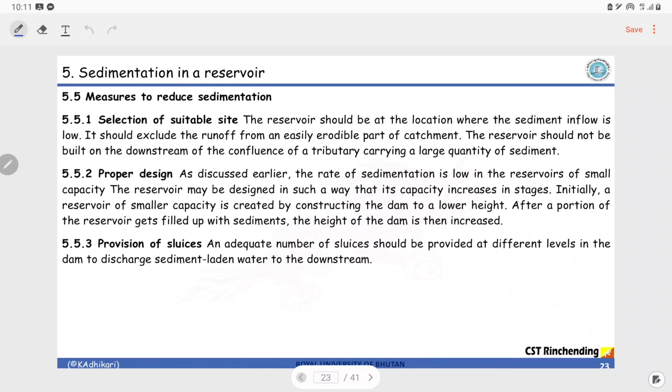That is the understanding. But if we look at the sedimentation versus capacity inflow ratio graph critically, we realize that this curve is not linear. With increase in capacity ratio, sedimentation does not increase linearly. Up to a certain limit, yes, it increases, but after that it remains kind of constant.

So till this region it increases, true, but after this it remains kind of constant. So if you construct a dam or reservoir that belongs in this domain, then of course there's going to be sedimentation. But if you construct a reservoir with a capacity inflow ratio more than this, then the sedimentation remains constant. So why don't we go by a very large reservoir? That is the point.

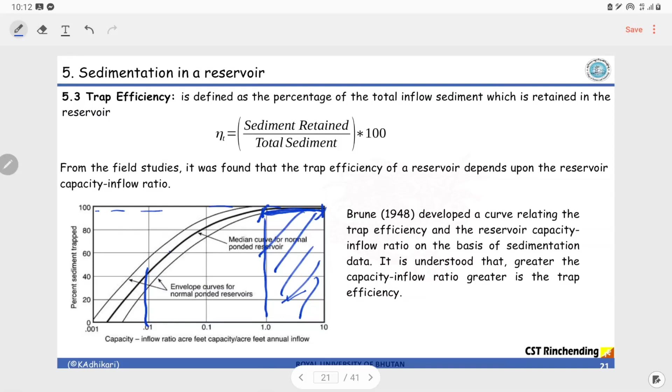So for a large reservoir, of course there will be tremendous sedimentation, but by going by this graph, the sedimentation remains constant. Even if you create a very large dam, the sedimentation would be the same as this one. So go for a very large dam. That is the meaning when we say this term, create a large reservoir. Although it is contradicting with the actual thing happening, the sedimentation happening in the reservoir, if we critically analyze the curve, we realize that creating a massive reservoir has an added advantage, because the sedimentation remains constant.

So that is one. Next, we are discussing the methods to reduce sedimentation. Next on the list is control of sediment inflow. So how do you control the sediment inflow? One way is constructing check dams. Check dams are constructed a little bit upstream of the main dam, so all the sedimentation occurs in the check dam, and later on you can remove it.

And there's another one, vegetation screens. Basically what we're trying to say is cover the entire catchment with vegetation. If there is deforestation, plant the trees, so that the roots hold the soil particles, resulting in less erosion, and the total sediment into the river reduces.

The next one is control of deposition. To control deposition, the best way is by providing a sluice gate. That is the most effective way. There are some other ways so that there is less sedimentation, but the most effective one is providing the sluice gate.

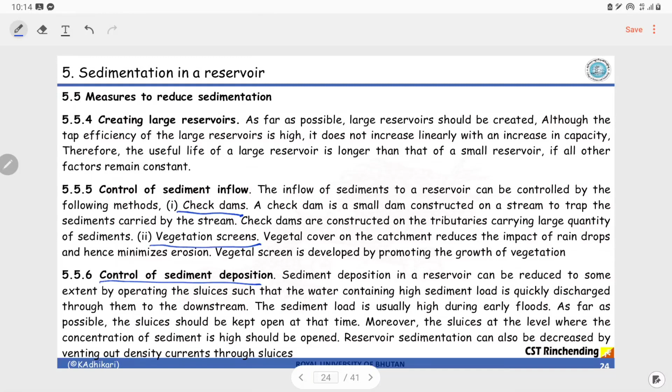There is also another method, that is physical removal of sediments. This means for a time being you completely let go the water, make the reservoir empty, and then you remove all the sediments. But that is going to be pretty expensive, very expensive. So usually this is not the choice. Instead, a sluice gate would be a better option.

So soil conservation measures are effective for controlling sedimentation in a reservoir to some extent, but are expensive, because you are applying the technique in the entire catchment, and the catchment can be very large. But these are very efficient long-term measures.

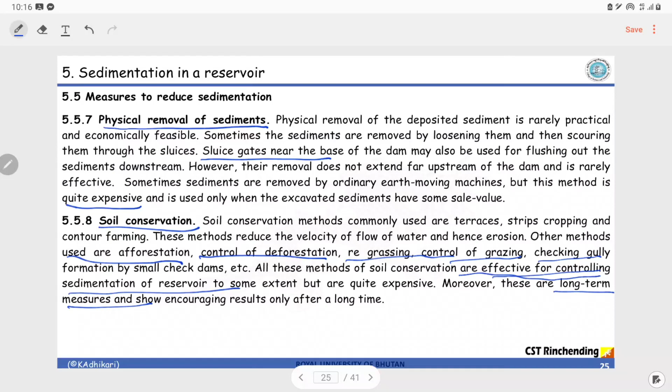And the next topic we have is losses from the reservoir. Now you have constructed a dam, there's a large reservoir, and you realize that the amount of water is drastically decreasing over time. It could be because of evaporation. When you hold water in a large pond, there is going to be huge evaporation. So there are methods to reduce the evaporation.

Next type of loss is absorption losses. Absorption means once you construct the reservoir, all the water rises up, and it is in contact with the mountain sides, and these mountain sides may absorb water. Eventually this will go as seepage into the groundwater. So this is one loss where, in the preliminary phase, if people see some kind of loose materials or fractured rocks, they do the treatment.

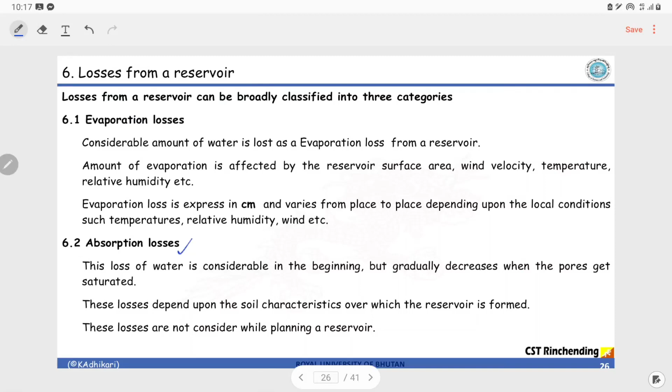This is a continuation on reservoir leakage and percolation. Within the site where the dam is constructed, there could be fractured rocks or seams that are highly permeable, leading to huge seepage and losses. During the construction phase, if such strata are found, some kind of treatment is done for those fractured rocks.

For large scale treatment, grouting is used. Grouting means you make a cement paste and spray it over that region. If you want to see this in the real world, you can visit any dam site in the country. One famous example is the Punatsangchhu Phase 1 project, where along the dam site they do grouting to control landslides. They do it for landslides, but it can also serve as a barrier so that there is no seepage.

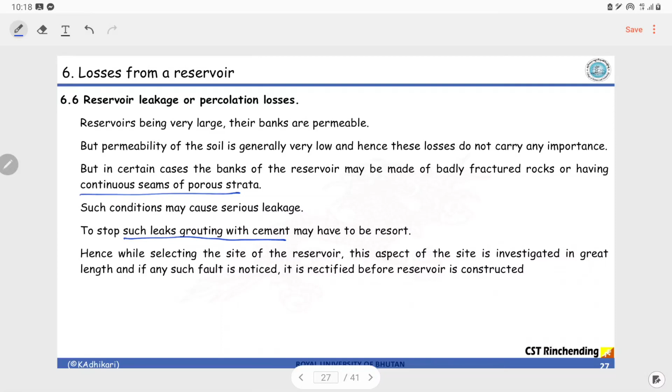Let's continue our discussion. Now we are going to discuss the dam. Till now we were discussing the reservoir, which is the pond formed upstream of a dam. A dam is an engineered concrete structure built across the river so it can hold the enormous water pressure and facilitate a reservoir.

Moreover, you cannot simply construct a dam and not let even a single drop of water downstream, as the aquatic life downstream will die. So you have to let at least some minimum flow, which we call environmental flow, from the dam. Sometimes an additional spillway is provided at the periphery, called an auxiliary spillway, and sometimes the spillway is not constructed over the dam itself, only the auxiliary spillway at the periphery is constructed.

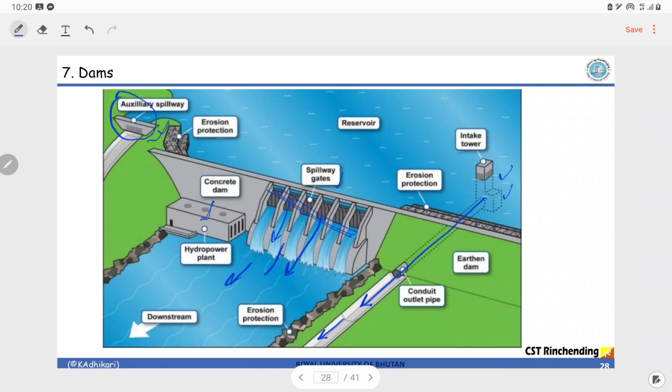Let's continue. So, preliminary investigation for dam construction - what kind of investigation is required? Basically there are three types: the first is surveying, the second is geological investigation, which is very important, and the third is hydrologic investigation, again very important.

In engineering survey, they map out and do the topographic survey of the entire stretch. For the dam site, they prepare a contour plan of 1:250 or 1:500, and for the reservoir, usually a lower resolution contour is generated out of surveying.

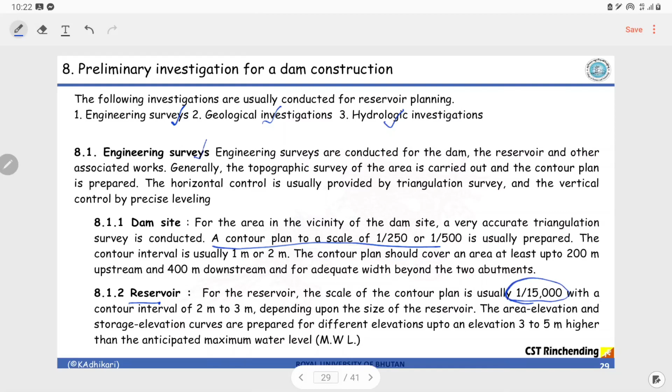During the engineering survey, when you plan for a reservoir, the first thing you do is the engineering survey. In olden days, people used the theodolite, dumpy level and total station to do the surveying. Now people use advanced technology like LiDAR, GNSS and GPS systems to survey on a large scale, which is more accurate, less time consuming, and less expensive compared to traditional equipment.

Next is the geological investigation, which is what you guys are expected to do. For geological investigation, the most important thing is to find out whether the foundation of the dam is suitable or not. There are various methods for this; they usually go for subsurface exploration, meaning they find out what kind of strata, rock, and soil properties exist where you construct the dam.

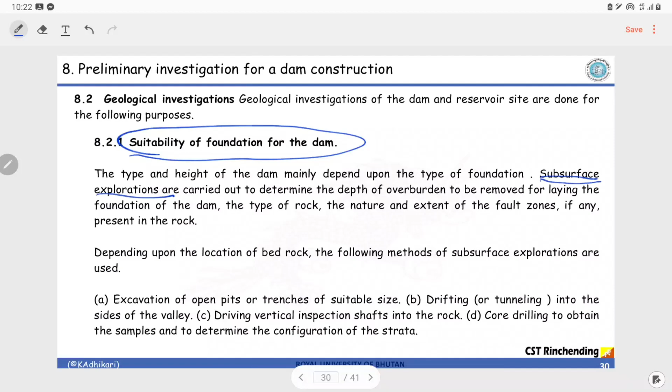For subsurface exploration, there is excavation of open pits - they dig the pit and take samples out. There's also drifting or tunneling, where they bore a hole from the mountain to take out samples, and vertical inspection shafts into the rocks, where they drill a hole into the rock to take out samples. Core drilling is often done to determine the configuration of the strata. They do this to get the information.

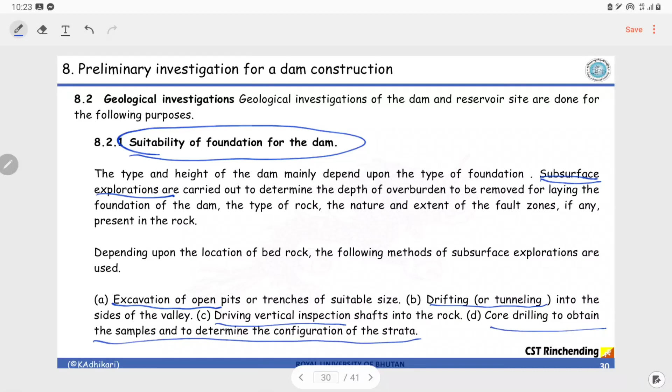They also check for water tightness of the reservoir. As the name suggests, water tightness means checking if there are fractured or fissured rocks, cavities, or porous mediums, which are not desirable. If such geological formations are identified, they will try to remove this and replace it with concrete, or do some kind of treatment to conserve water. If the strata in the periphery of a reservoir or dam is porous, there will be huge losses due to seepage, which is not desired.

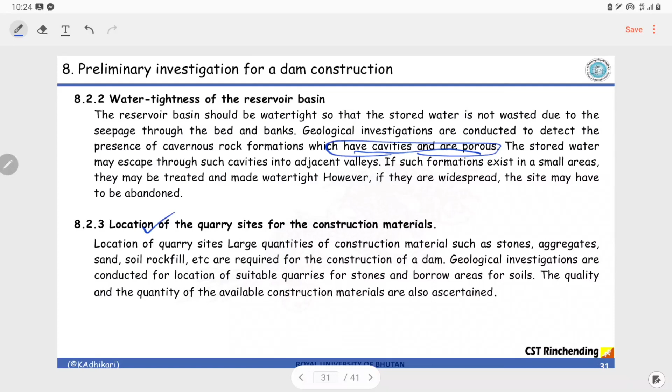The next point is the location of the quarry sites. Quarry site means where you extract the raw materials for construction. If your quarry site is far, there's a cost of transportation, so the overall cost will increase. If there are quarries nearby, then this rock or construction material will be utilized to construct the dam.

The third one is the hydrological investigation. In hydrological investigation, they basically do the runoff pattern and yield estimation. Yield means how much product, and when translated to a river, it means how much water is available. You check how much water is available, and whether that is sufficient to fill up your dam in a certain period of time. If that much water is not able to fill up the reservoir, then the site of construction of the dam may have to be changed.

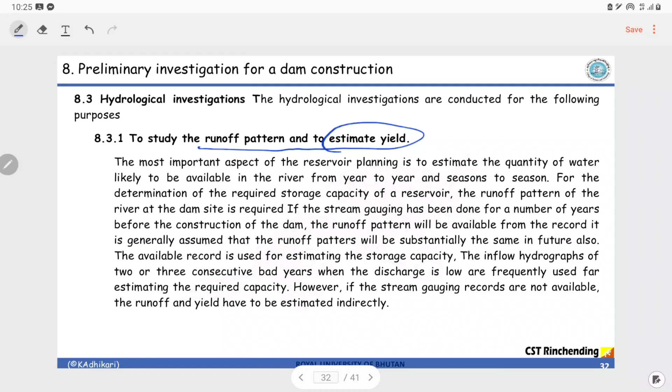They basically do discharge computations. They will see the possibility of high flood scenarios and low discharge. When there is low discharge, they check whether the demand line will be fulfilled or not with stored storage. This kind of analysis they do.

Next, as I explained, is the maximum discharge. Maximum discharge here means the flooding scenarios. When a huge flood comes, we have to have an adequate spillway, else there is always a chance of the dam being overfilled, and there is always a stability issue. If the water level goes beyond the maximum level, there's always a chance of failure, which is not desirable. So they calculate the maximum discharge possible in that catchment, and accordingly design the spillway, so even if there is a flood, we have a spillway to let off the flood discharge downstream.

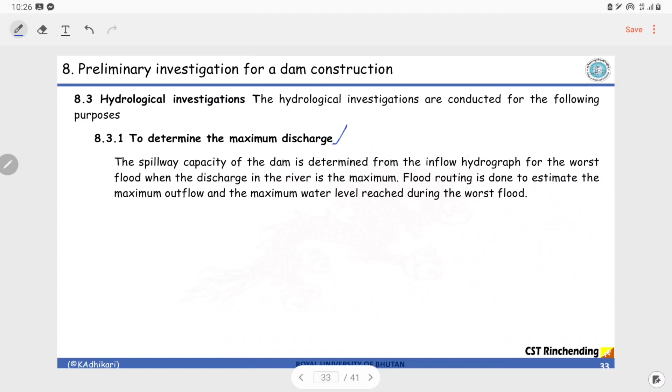After you construct a dam, you generate power, and in our case we sell that power. We have to check in how many years the cost of construction can be recovered. If you construct a dam so expensive that in the next 100 years you cannot recover the cost, then we are in loss - that would be a very stupid idea. So we do this economic balance analysis. If we cannot overcome the cost of construction, meaning retrieve that much money through selling services, it is a loss, so you may not go for that project.

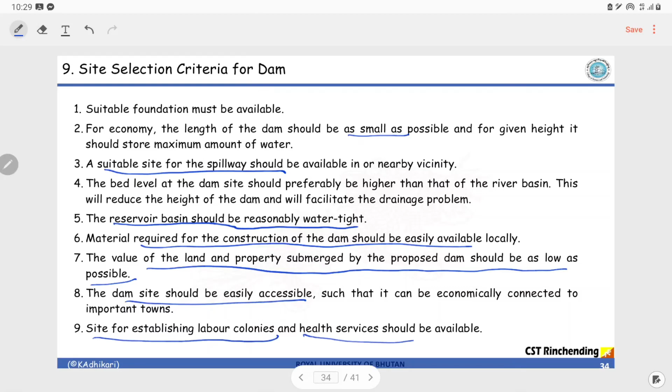Okay, now let's discuss the classification of dams. We have basically 4 types of classification. So let's go one by one.

The next one is the gravity dam. The highlight of the gravity dam is that its weight counterbalances the pressure of the water, and it is a concrete dam or masonry. The span is kept narrow to keep the cost minimum. The main highlight is that the weight of the dam counterbalances the pressure force.

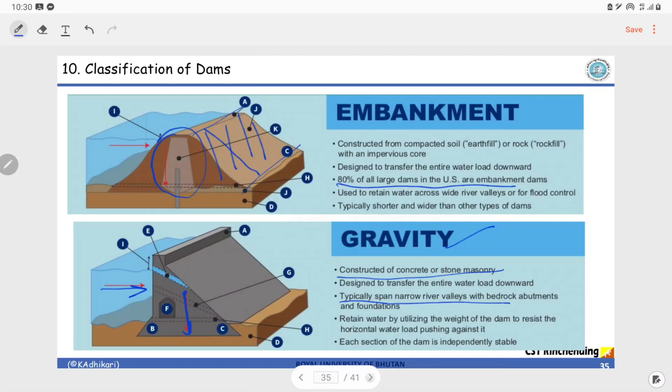Another one is the arch dam. The interesting part of the arch dam is that, as you see, it is in arch shape. So let me draw here. If this is a river, the dam is like this, and the main forces are transmitted into the periphery wall, so in a sense the foundation of the dam is on its sides. All the forces go here and are transmitted here, and usually it is thin compared to other types of dam. The best example is the Hoover Dam in the United States, constructed in a great canyon. A canyon is all rock, so it has very rigid boundaries, making the arch dam feasible there. Another type of dam is the buttress dam.

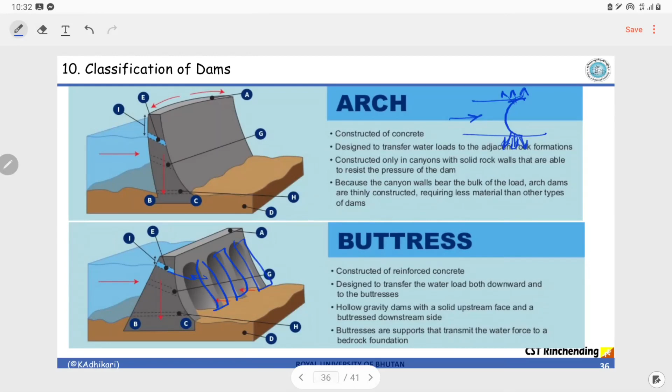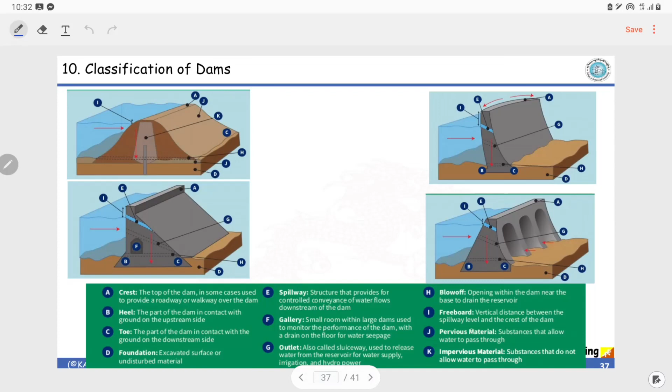Buttress means we give this kind of buttress here; these small structures give additional strength. So I have given all 4 types of dam here, and all the details are in the footnote so you can make a quick reference.

Now, selection of type of dam. So you have a site, you want to construct it, you have already identified a site. Now on that site, what are the factors that decide which dam you need to construct? This is what we are going to answer here.

A narrow U-shaped valley with rocky walls suggests a concrete dam, since rocky walls mean a rigid foundation, so a concrete dam is preferred. In a rolling plain, like in India, a low height dam is preferred, like an earth dam, which will never be constructed very high, unlike the concrete dam.

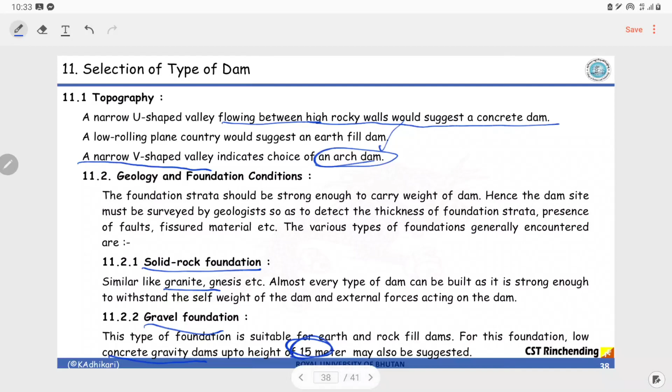A narrow V-shaped valley is the choice for an arch dam. Other factors are geology and foundation. If there is a rock solid foundation like granite, it can hold a massive dam, so you can construct a very huge dam there. If it is a gravel foundation, you should go for a concrete gravity dam up to a height of 15 meters and not beyond. 15 meters is roughly the height of a 5-story building.

Silt and fines are not very good material for a foundation, so a very low type of gravity dam is preferred, with height not more than 8 meters. If it is a clay foundation, the foundation has to be treated first before it's advisable to construct the dam.

Now, the next factor that determines which type of dam to construct is availability of material. If you think of constructing an earth-filled dam and there is no soil of the required quality available, then transportation cost would be incurred, which would be expensive.

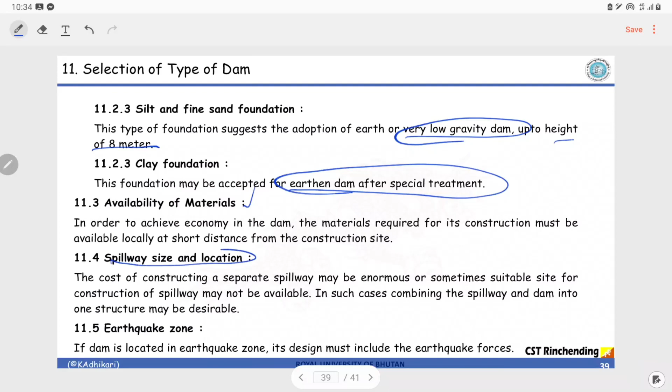Other factors are spillway size and the earthquake zone. In our case, we are in a very high earthquake prone area, so we also have to take earthquake forces into consideration.

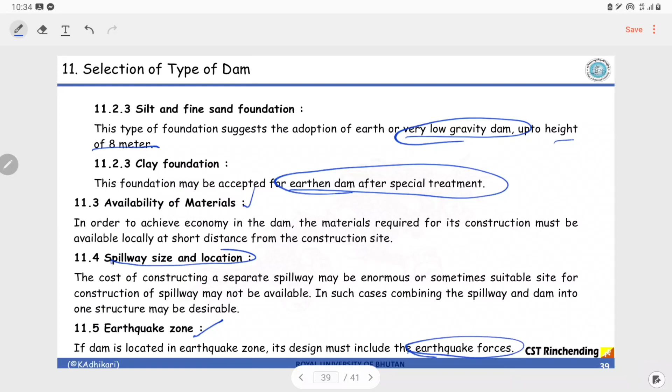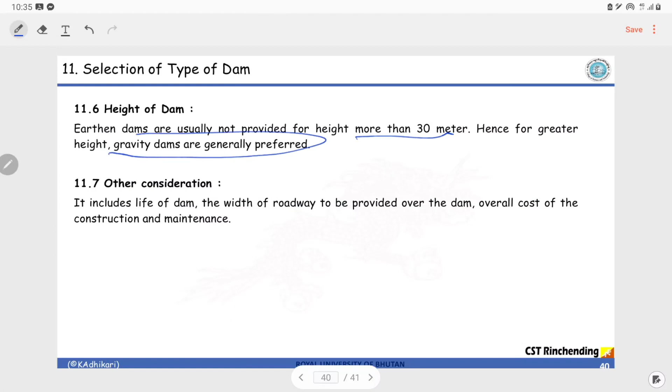Finally, we have the height of the dam. So what height is required? Based on that also we decide which dam to use. If it is more than 30 meters, a concrete gravity dam is always constructed. And there are other considerations as well.